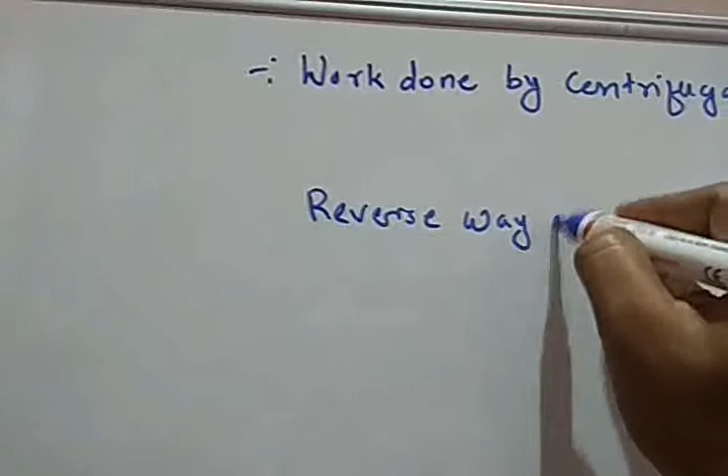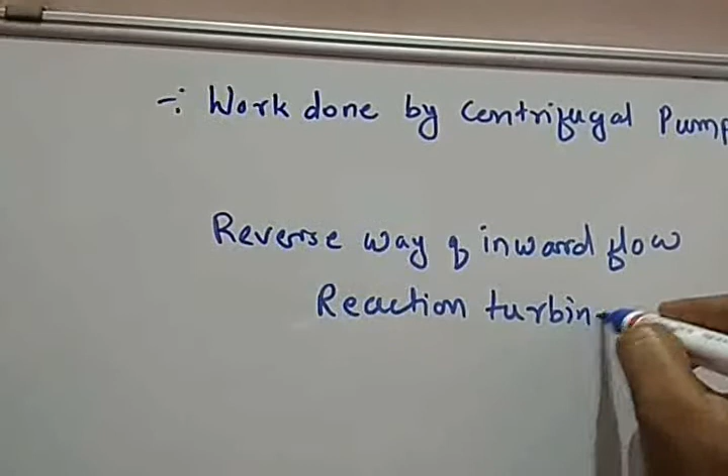Before actually moving to the work done, we'll see one thing: the centrifugal pump or the impeller works in a reverse way of an inward flow reaction turbine.

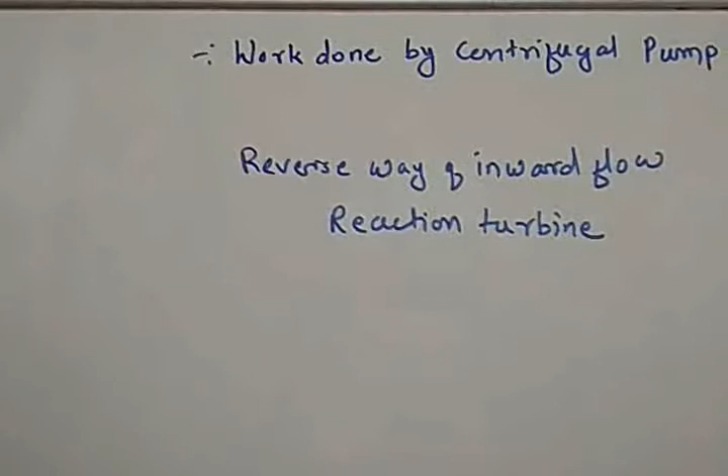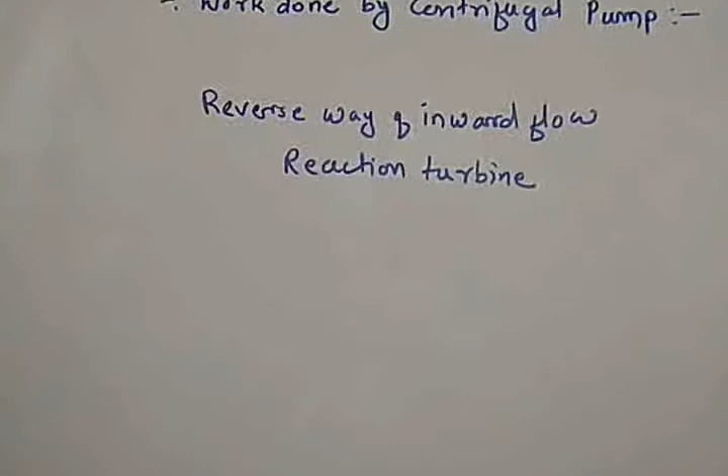Now in this case, we can get the work done of a centrifugal pump or the impeller as a reverse of the work done of an inward flow reaction turbine. In the previous lectures, we have already seen what is the work done on a runner per second per unit weight of an inward flow reaction turbine.

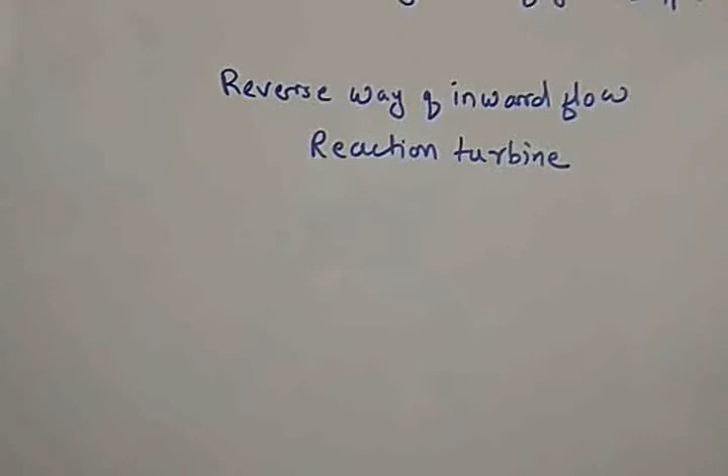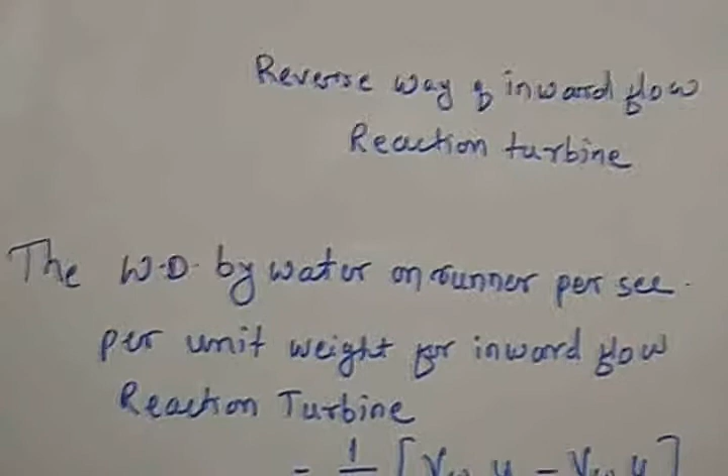I'll write that particular equation first. The work done by water on the runner per second per unit weight for an inward flow reaction turbine is given as 1 by G times VW1 U1 minus VW2 U2.

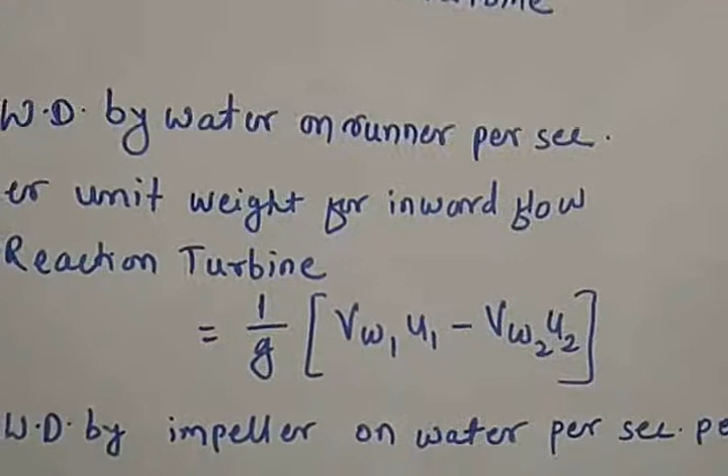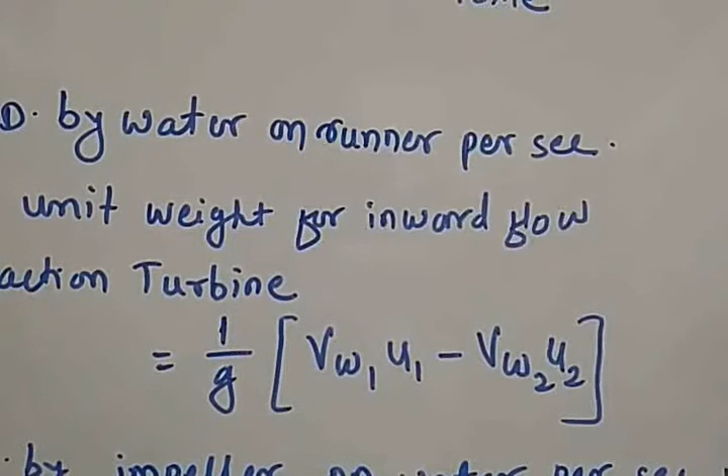Here G is the gravitational acceleration, VW1 is the whirl velocity at the inlet of the turbine, U1 is the vane velocity at the inlet of the turbine. Similarly, VW2 and U2 are the whirl velocity and vane velocity respectively at the outlet of the blade.

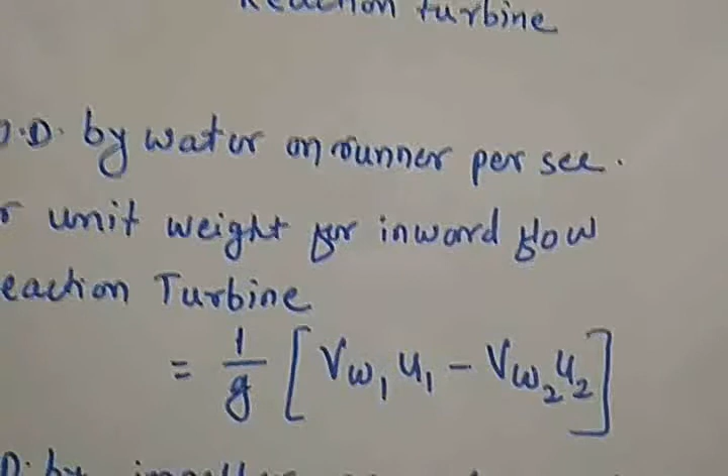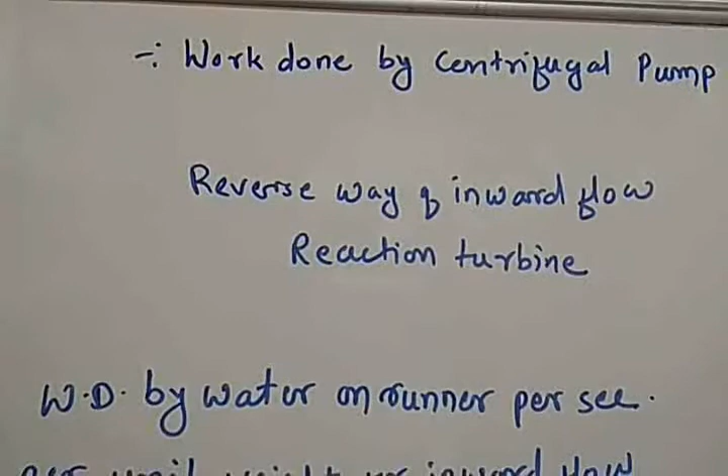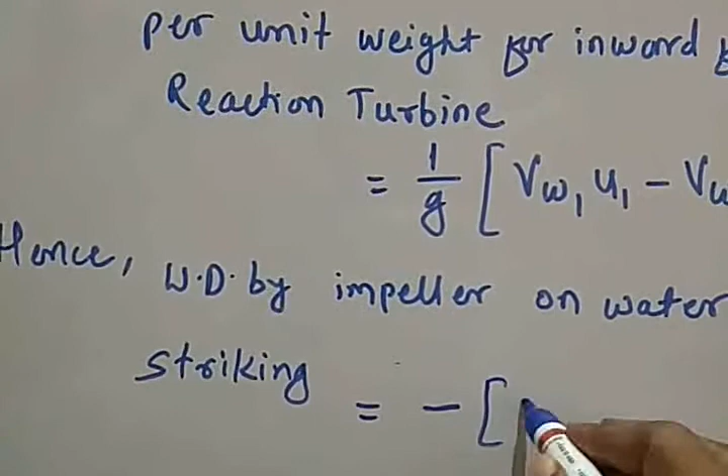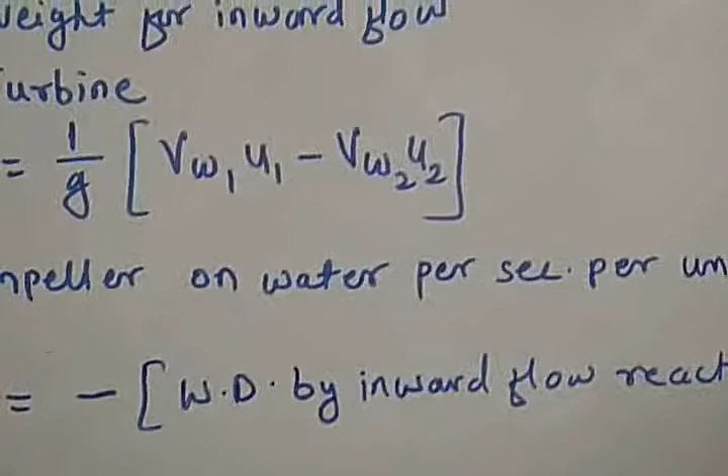Now, as I said earlier, the centrifugal pump works in a reverse way of an inward flow reaction turbine. So hence the work done by the impeller on water per second per unit weight of water striking is given by the reverse - that is, minus the work done by the inward flow reaction turbine. So reaction turbine, minus, reverse is there, so hence I am using the minus sign. So hence I can write this as minus

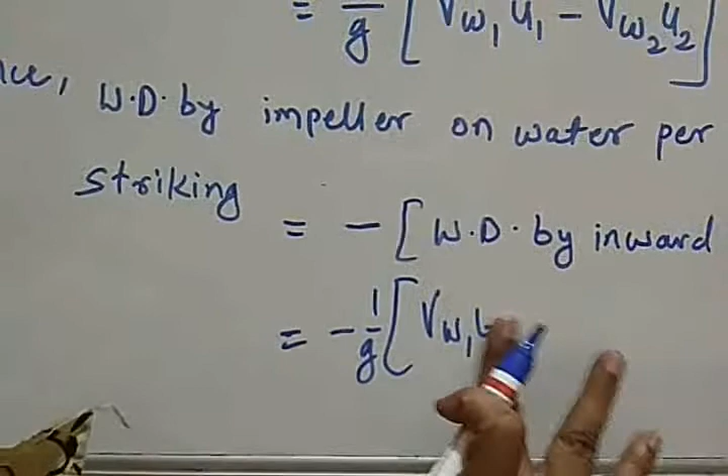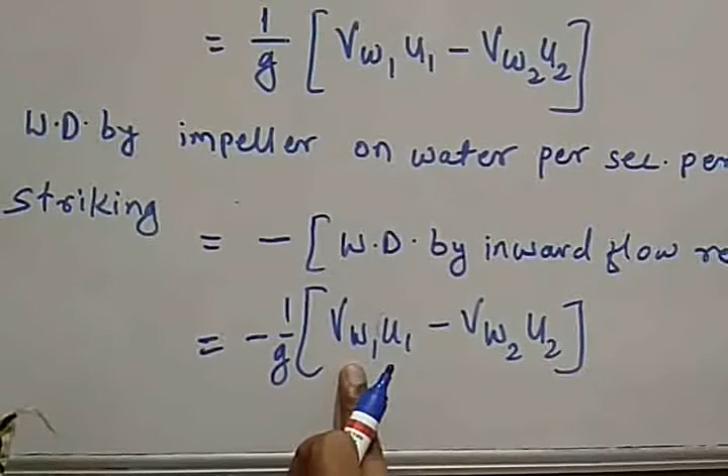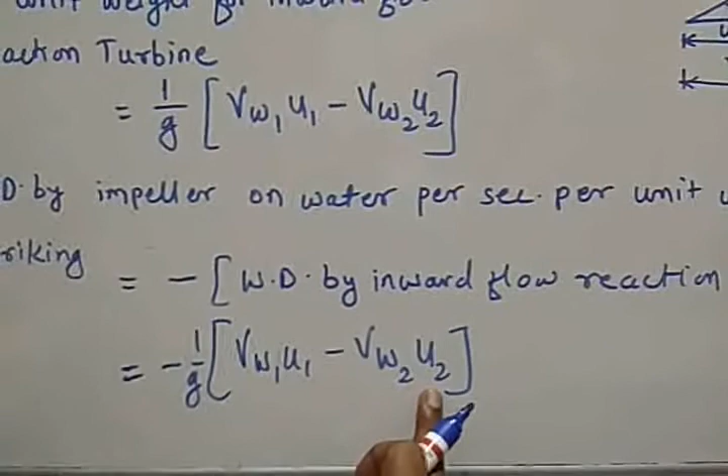1 by G, VW1 U1 minus VW2 U2. Now here VW1 is the whirl velocity at the inlet of the impeller, U1 is the mean velocity at the inlet of the impeller, VW2 is the whirl velocity, U2 is the mean velocity at the outlet of the impeller respectively.

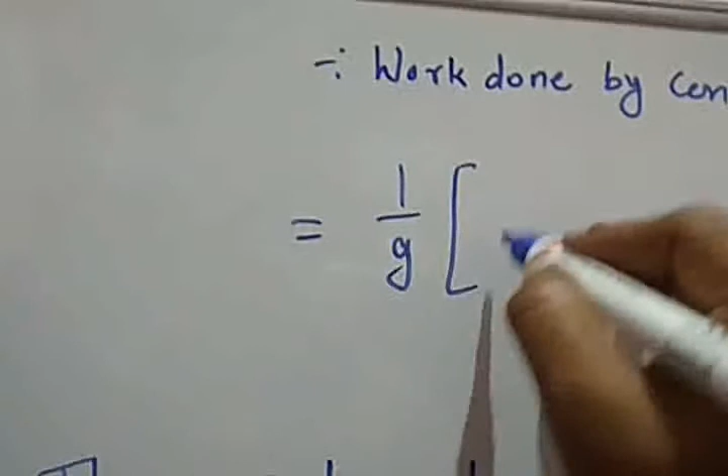So I can write this work done equation as 1 by G times VW2 U2 minus VW1 U1.

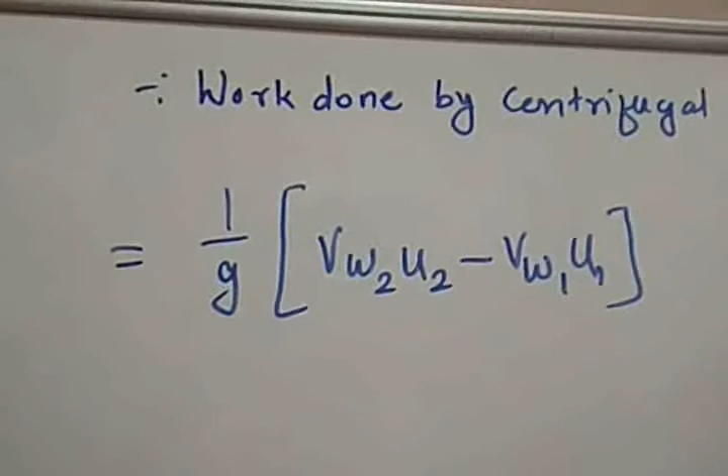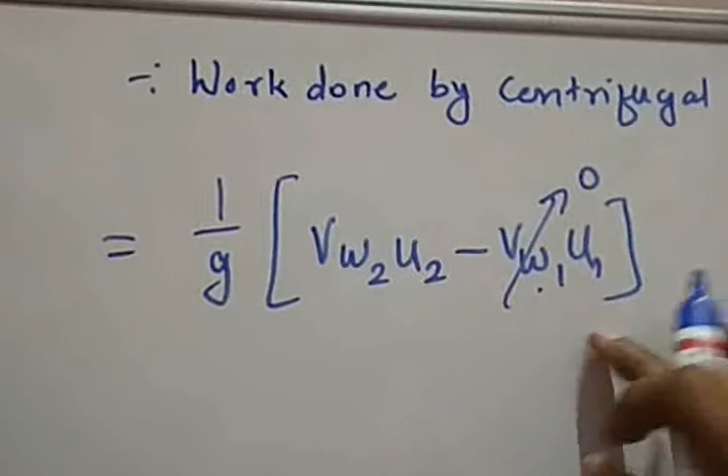Now for better efficiency, the water comes into the impeller in a radial direction, so the inlet to the impeller is radial. As the inlet to the impeller is radial, VW1 becomes 0. We'll see how this becomes 0 with the velocity triangle.

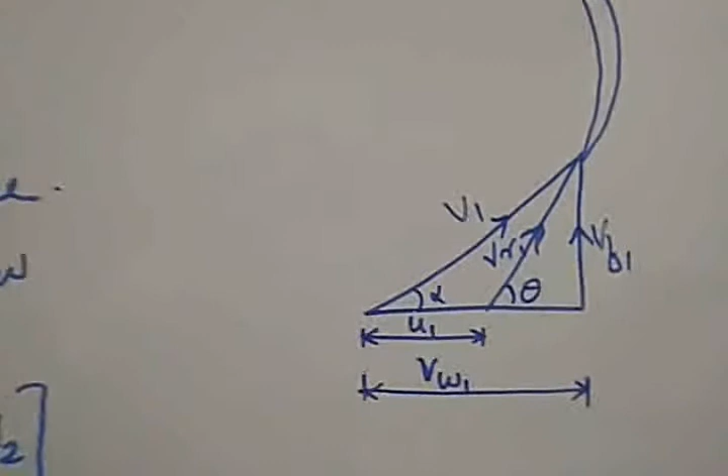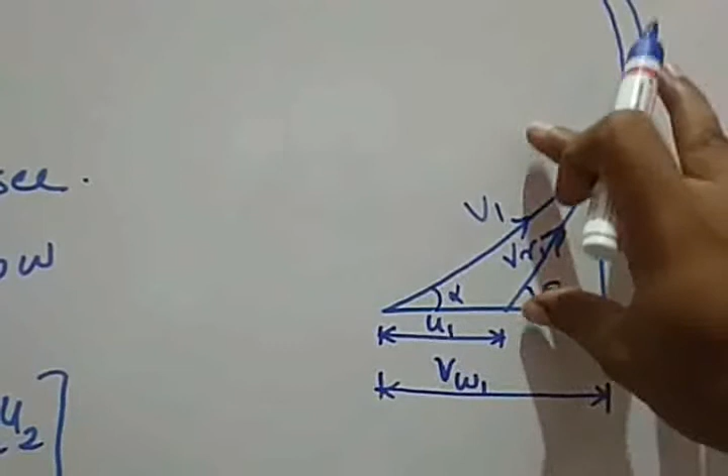So we know this particular velocity triangle for the inlet. As the inlet is radial, V1 will become perpendicular to U1. So as V1 is becoming perpendicular to U1 for a radial entry, VW1 becomes 0.

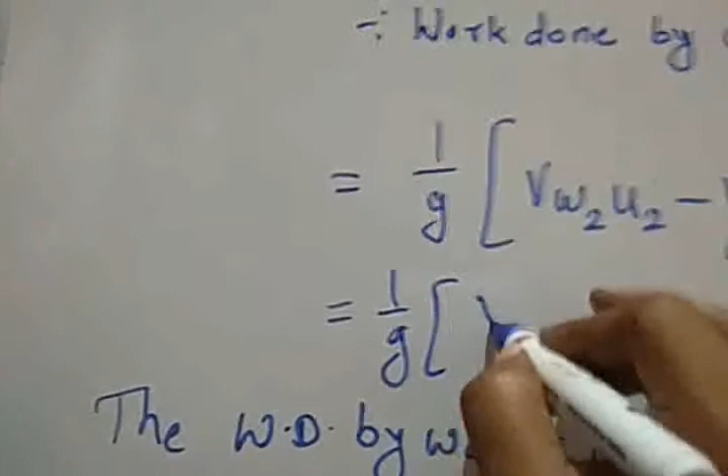Hence this equation will be further reduced to 1 by G VW2 U2 only. So this is the work done by the impeller per second per unit weight of water striking.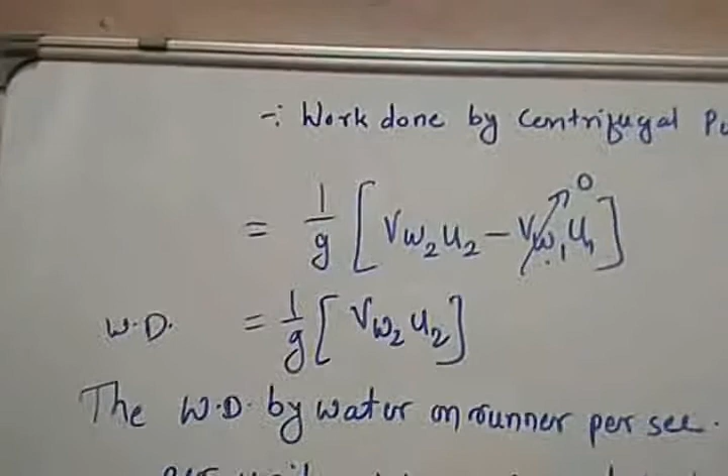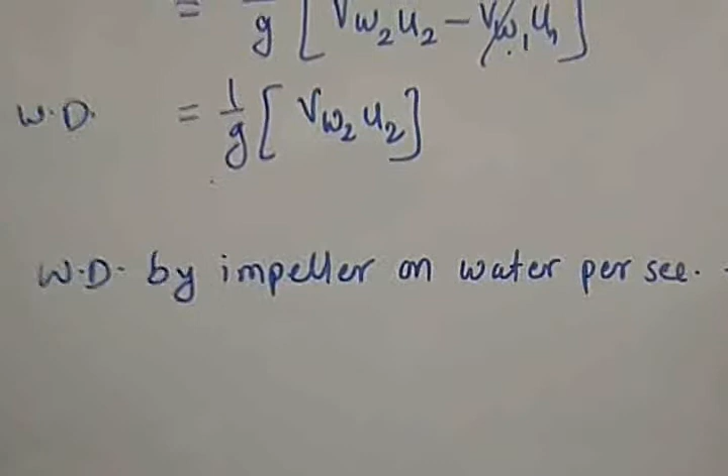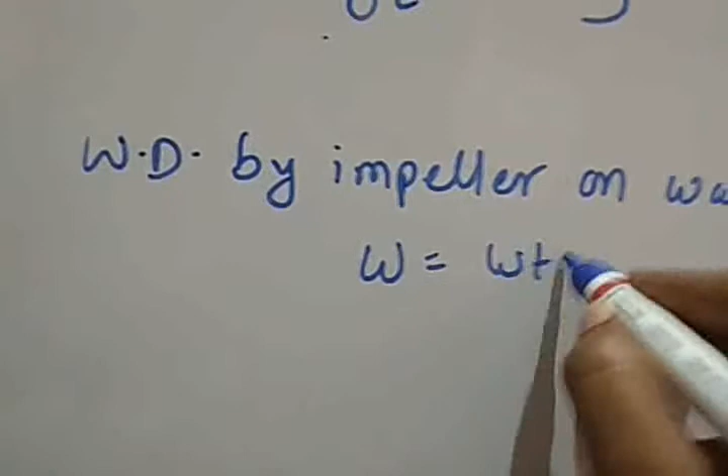Further, this work done by the impeller on water per second is given by W by g times Vw2 U2, where W is the weight of liquid, and it is given by rho g Q. Rho into Q is the mass, into g will give you the weight.

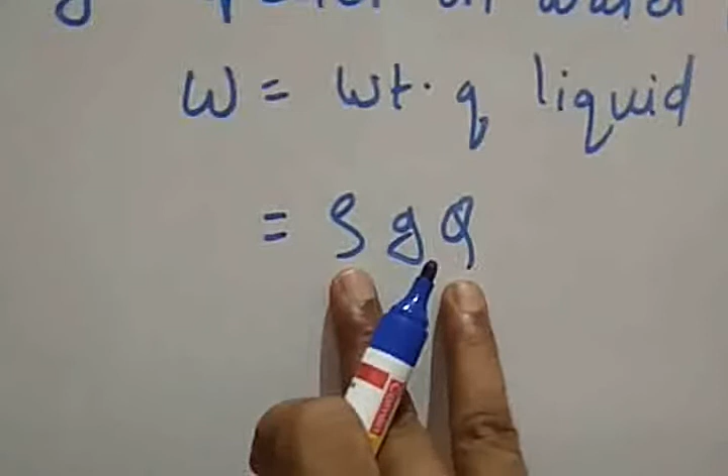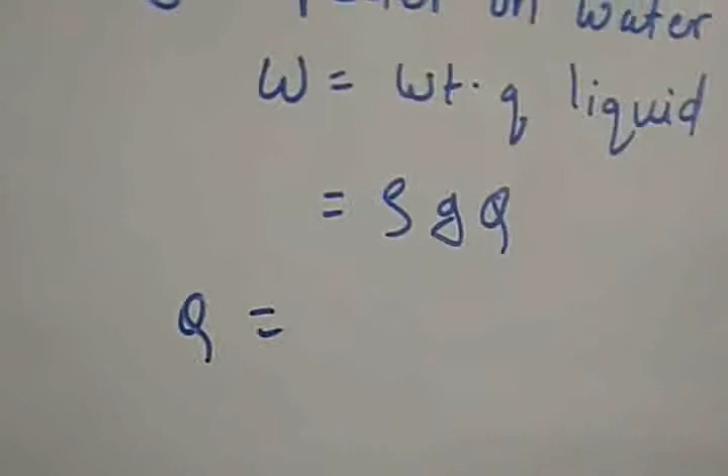Q is the volume flow rate of water, so Q will be given by area into the flow velocity. So area - now this is the impeller.

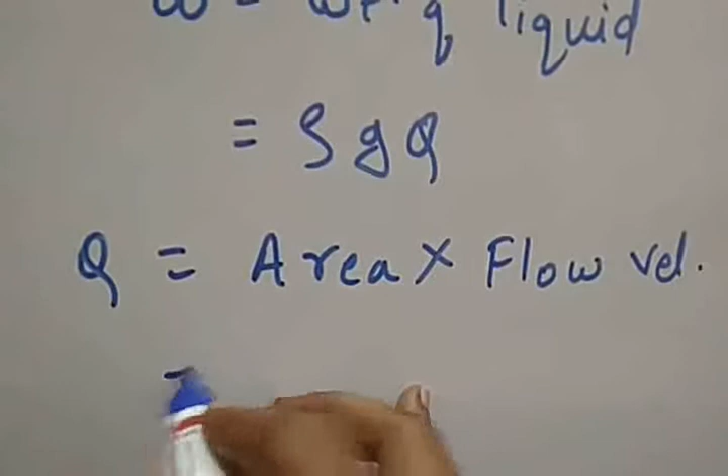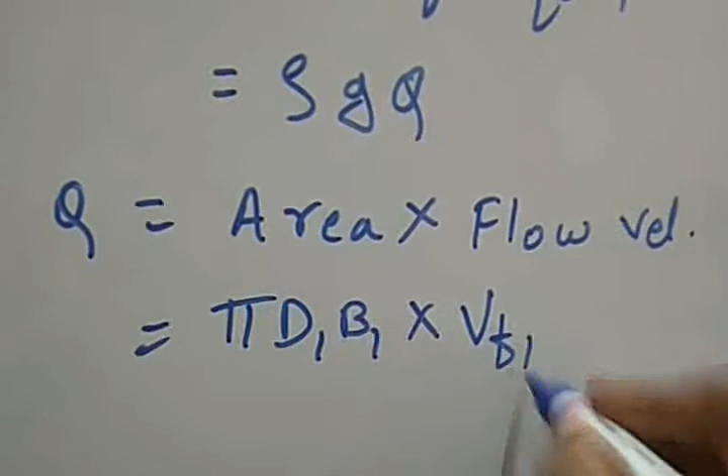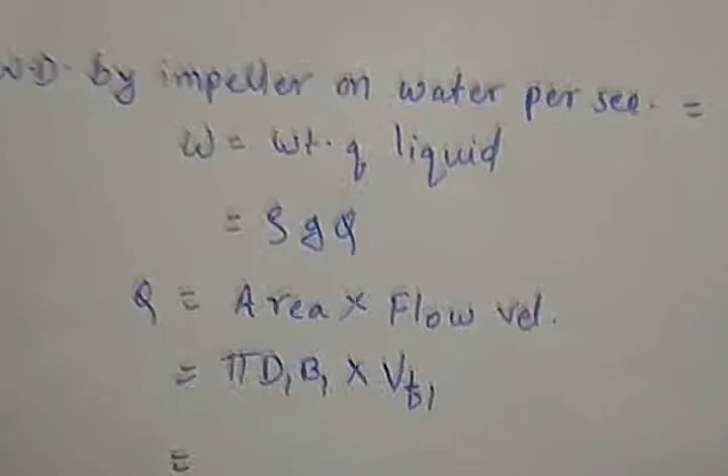So for the impeller, the area at inlet will be pi d1 b1, this area into the flow velocity vf1 at the inlet. Similarly, assuming there are no losses, whatever flow of liquid at the inlet, the same flow of liquid will be at the outlet, so pi d2 b2 into vf2.

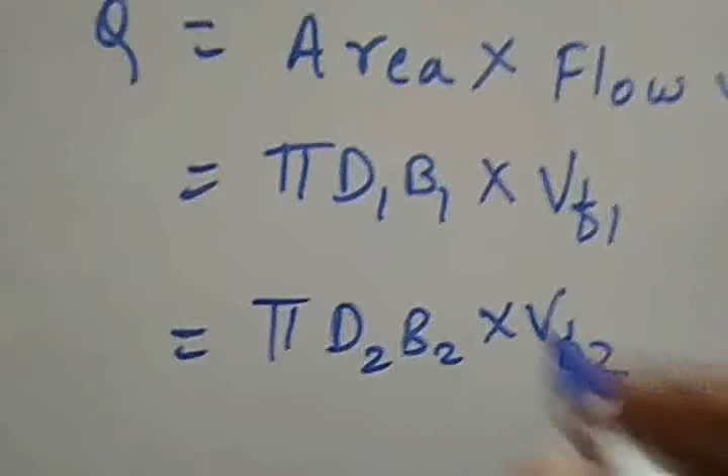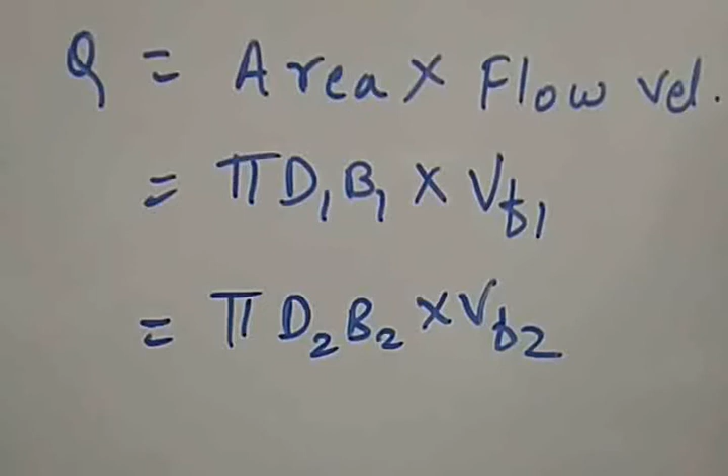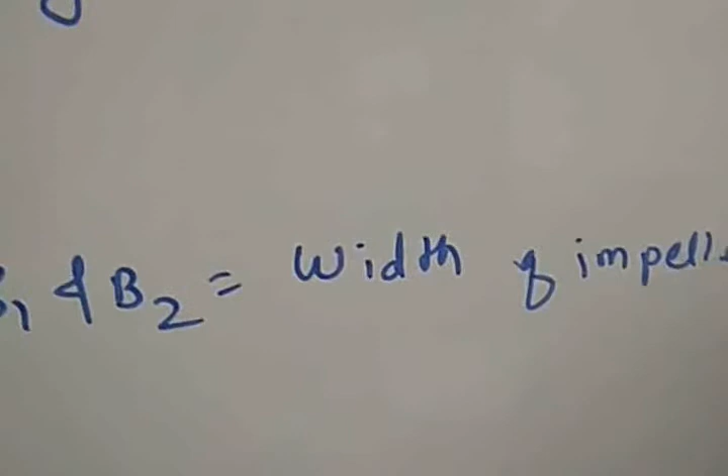Now here d1 is the diameter of the impeller at the inlet, and b1 and b2 are the width of the impeller at inlet and outlet respectively.

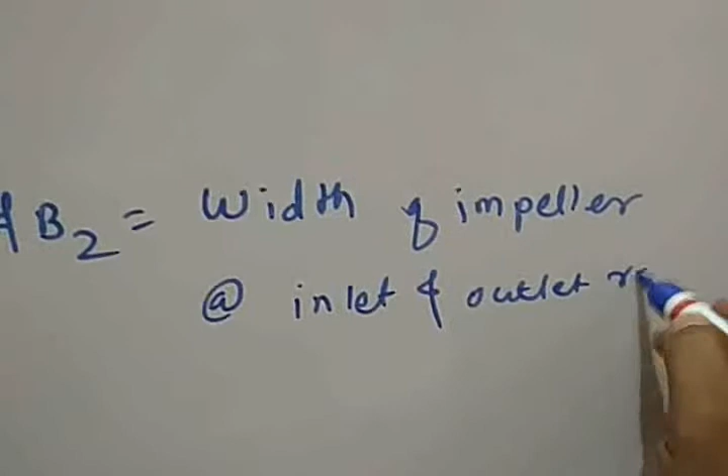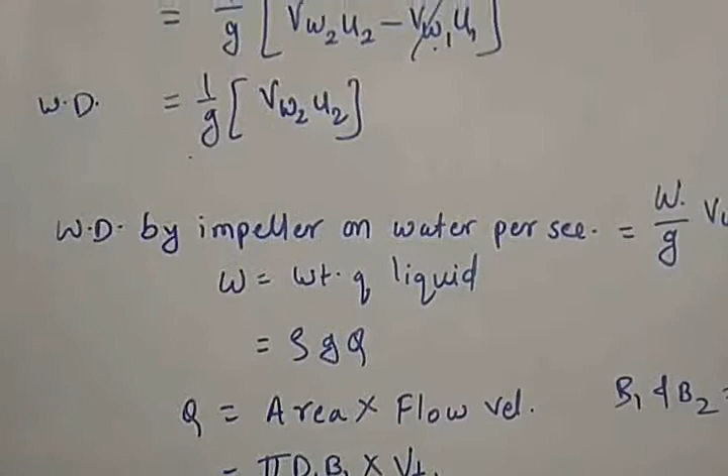So this is the work done we can get per second, work done by the impeller on water per second. Now we will see what is the velocity triangle for the impeller.

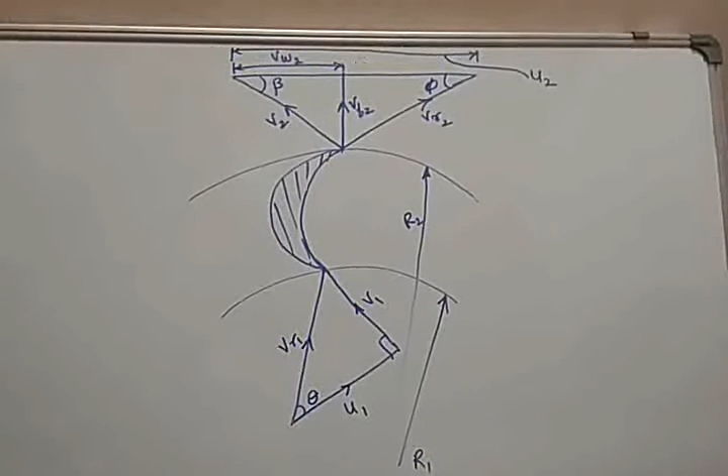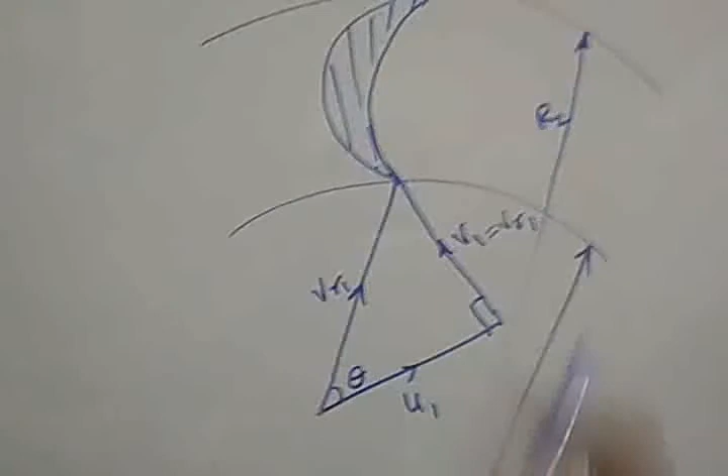So this is the velocity triangle at inlet and outlet for the impeller. As we discussed earlier, the inlet to the impeller is radial, so you can see over here V1 is equal to Vf1, which is perpendicular to U1. So this is the inlet velocity triangle.

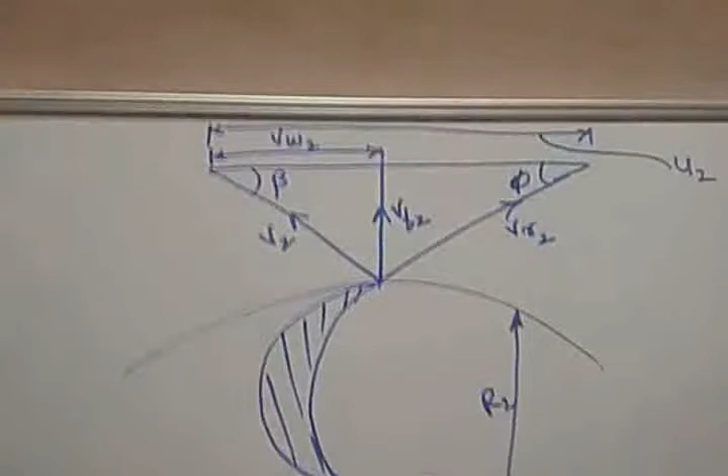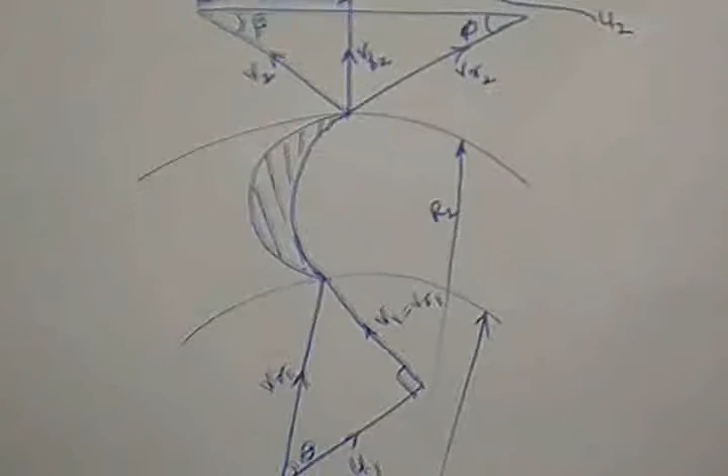This particular triangle is the inlet - suffix 1 represents the inlet point, suffix 2 represents the outlet point. Now R1 and R2 are the radius of the impeller. Theta is the angle made by the relative velocity with U, the mean velocity.

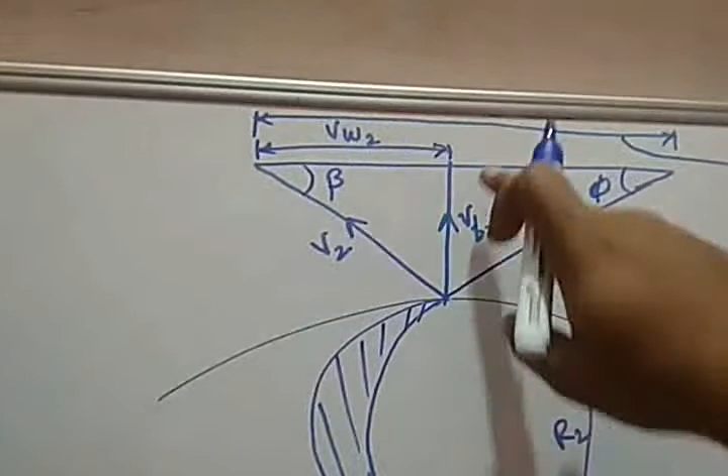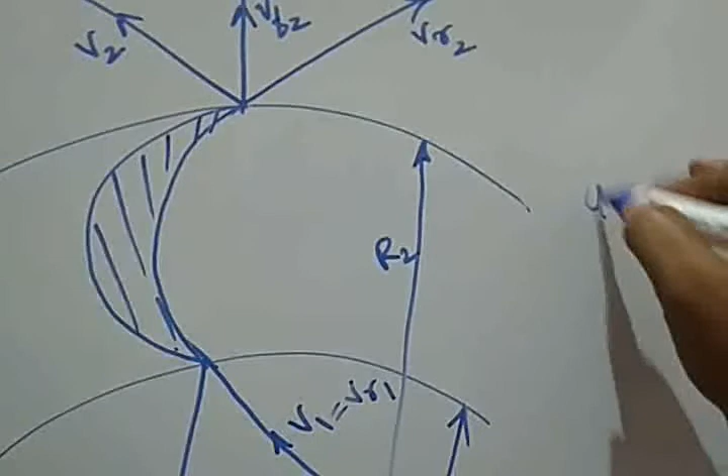Now at the outlet, you can see the relative velocity, then flow velocity, and then the absolute velocity V2. This particular length is VW2, the whirl velocity at outlet. This entire length is equal to U2, the mean velocity. So U1 is given by pi d1n by 60, and U2 is given by pi d2n divided by 60.

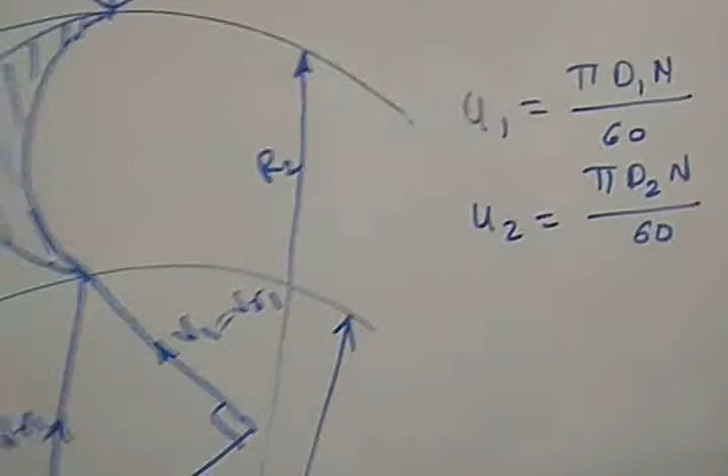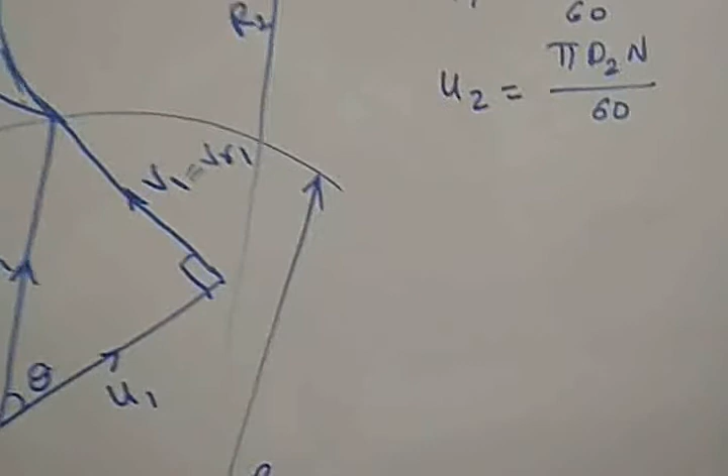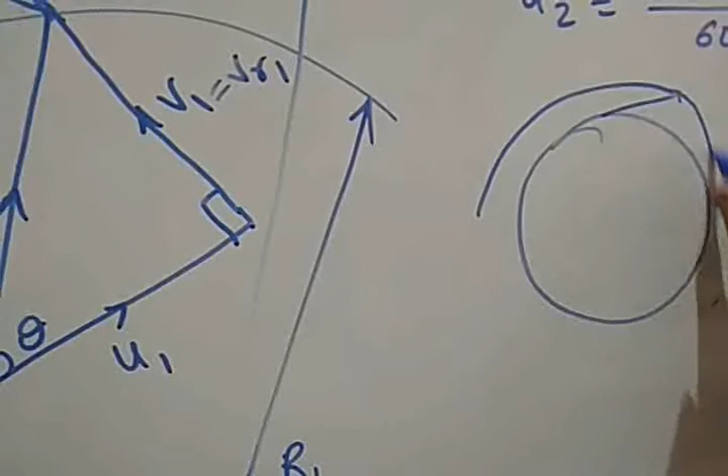So this is the velocity triangle for the impeller at inlet and outlet. Now previously we have seen the area of the impeller as pi d1 b1. So assume this is the impeller, having this width - let's call this width b, and this is the inlet diameter d1.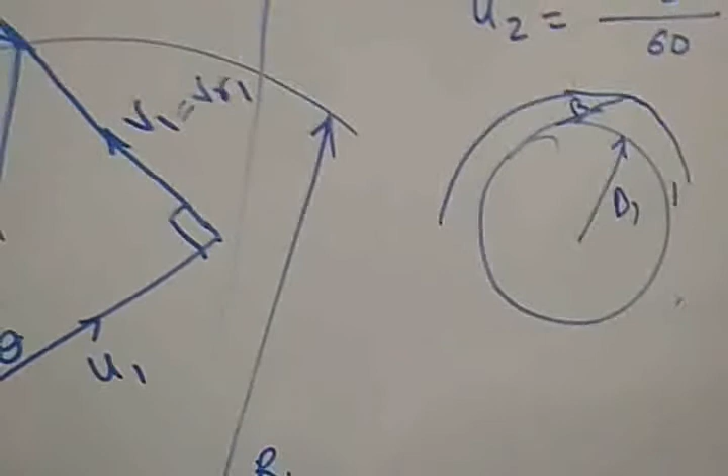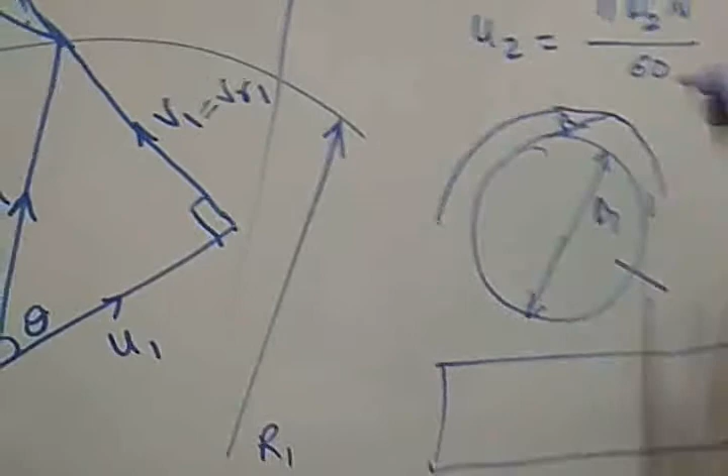Then if I cut it and open it, I'll get a rectangle, since the water is flowing something like this. So I'll be having this length as pi d1, that is the circumference, and the width is b1. Similarly, you'll get the area at the outlet as well.

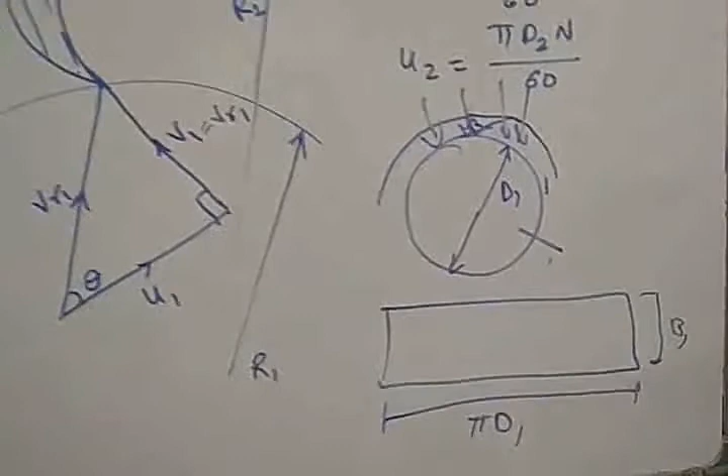So this is the work done and the velocity triangle for the centrifugal pump we have seen. Thank you.